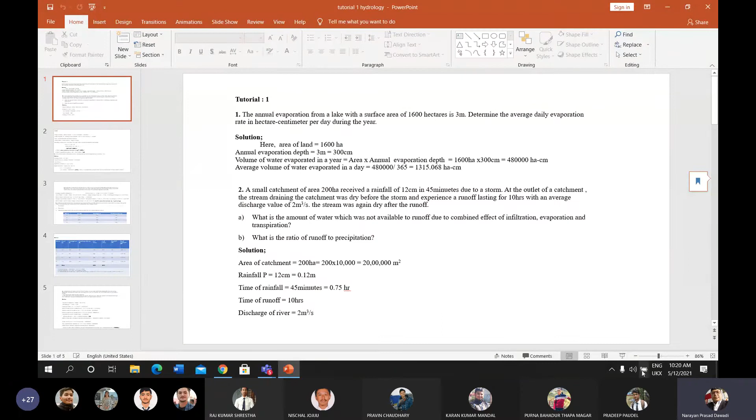Numerical problem related to the water budget equation, which we have studied in chapter first. This is the tutorial related to chapter 1, tutorial question number 1. The normal annual evaporation from a lake with a surface area of 1600 hectare is 3 meter.

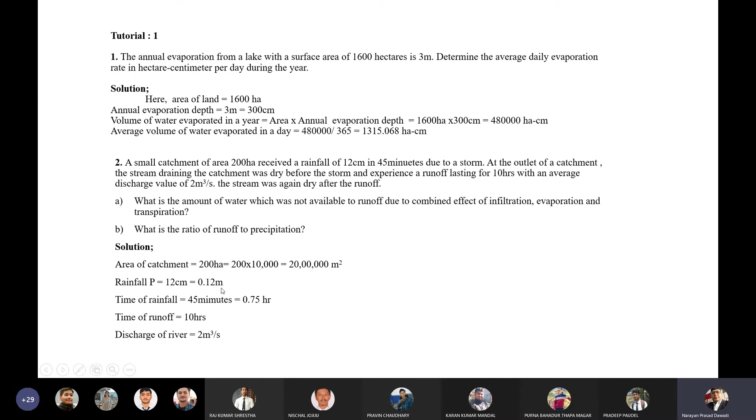Volume of runoff: we are given the discharge of the runoff and the time of runoff. Discharge is given in meter cube per second, time is given in hours, so the time should be converted into seconds to get the runoff volume R. The runoff volume will be discharge into time. The seconds cancel, and you will get the value in meter cube. This gives 72,000 meter cube.

Now, from the water balance equation, volume inflow minus volume outflow is equal to change in storage, denoted by delta S, as we discussed in the theoretical portion of chapter 1. The river was dry before the runoff entered, and it starts flowing with a discharge rate of 2 meter cube per second for 10 hours. After 10 hours the river again becomes dry. So the initial storage S1 is equal to 0, and the final storage S2 is also 0. The difference S2 minus S1 is 0. That's why the change in storage delta S is equal to 0.

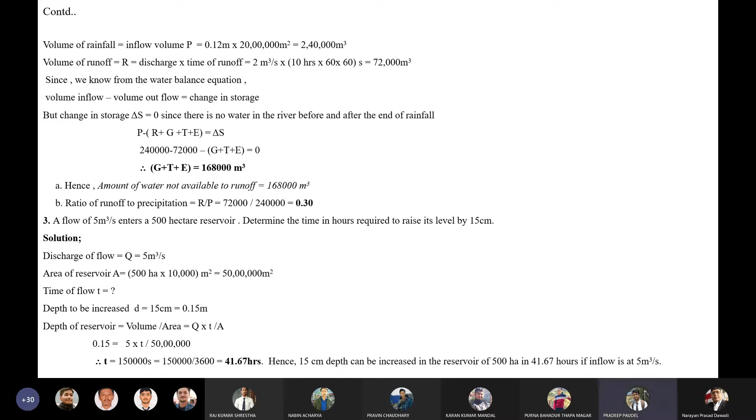Now, let us move to the question number. Estimate the constant rate of withdrawal. Constant rate of withdrawal, discharge. What will be the discharge withdrawal from the reservoir? Estimate the constant rate of withdrawal from a 1375 hectare reservoir in a month of 30 days. All this is estimated for the monthly basis.

The month contains 30 days during which the reservoir level dropped by 0.75 meter. The depth of reservoir was greater before 1 month. That depth of water is dropped by 0.75 meter. That is, change in storage is decreasing, not increasing, because the depth of water is being depressed or dropped. That's why the change in storage delta S value must be negative, because it is not increasing, it is decreasing. In spite of an average inflow into it was 0.5 million meter cube per day.

During this period, average seepage loss from the reservoir was 2.5 meter. The seepage loss was 2.5 meter. Total precipitation in the reservoir was 18.5 centimeters. The total amount of storm water that falls in the reservoir was 18.5 centimeter, and total evaporation was 9.5 centimeter. That is, total evaporation depth from the reservoir was 9.5 centimeter during 30 days. 18.5 centimeter entering water and 9.5 centimeter leaving the reservoir due to the evaporation.

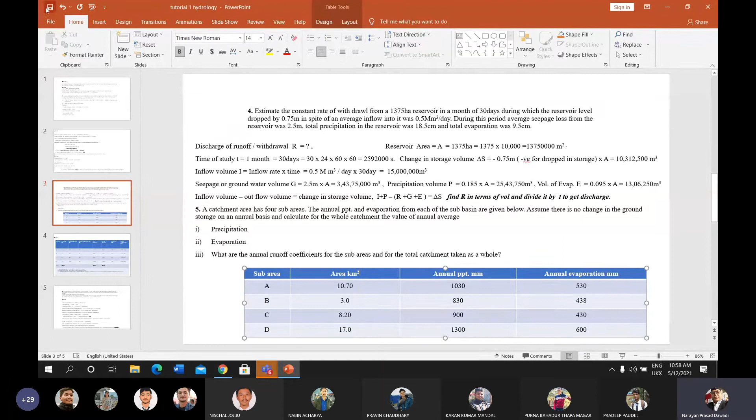Let's say now the annual precipitation and evaporation from each of the sub basins are given below for the year. Assume there is no change in the ground storage on the annual basis, meaning the groundwater level is not changed. Calculate for the whole catchment the annual average precipitation, annual average evaporation, and the annual runoff coefficient for sub areas and for the total catchment taken as a whole.

Four things are asked here. Find the average annual precipitation, find the average annual evaporation, find the annual runoff coefficient for each area, and with the help of each area's runoff coefficient, find the runoff coefficient for the total catchment area. This is question number 5.

I have already said that the annual runoff coefficient is the ratio of runoff to precipitation. You must know that. The question is given in tabular format: the area of each sub area, the annual precipitation, and the annual evaporation from that area are given. With these we can solve the problem.

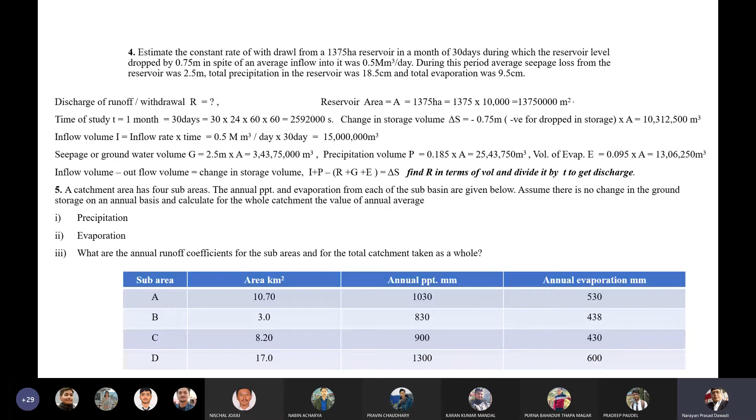Now I go forward to the next page. Solution. Sub areas A, B, C, D, area in kilometer square, annual precipitation in mm, annual evaporation in mm. Up to column 4, evaporation, this is given in the question. Now multiply the area by the annual precipitation.

10.7 into 1030, you will get the value of 11,021 kilometer square mm. The area is in kilometer square, precipitation is in mm, so multiplying them gives kilometer square mm as the unit.

Similarly, multiply the area with the annual evaporation. 10.7 into 530 gives 5671. 3 into 438 gives 1314. 8.2 into 430 gives 3526. And 17 into 600 gives 10200.

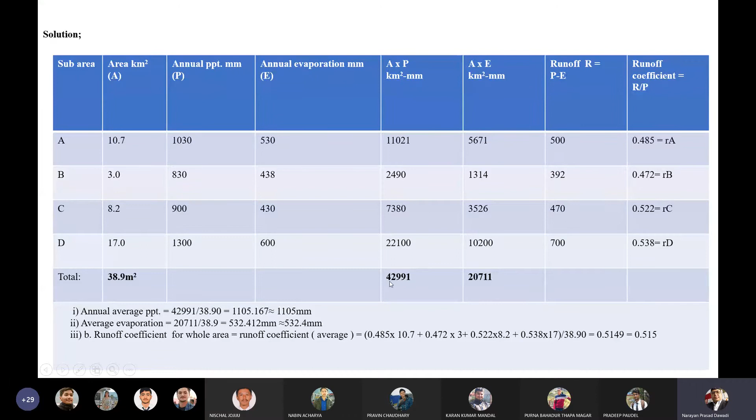Add all the values of A into P, you will get 42991. And add all the values of A into E, you will get 20711. This is the summation. If you sum all of these values, you will get this.

If you sum up the areas, you will get this. These are the summation of area, summation of A into P, and summation of A into E. You will get these values. After having these values, you can solve the problem in the tabular format or in the numerical pattern as in the written format. Now, runoff coefficient: runoff is given as P minus E.

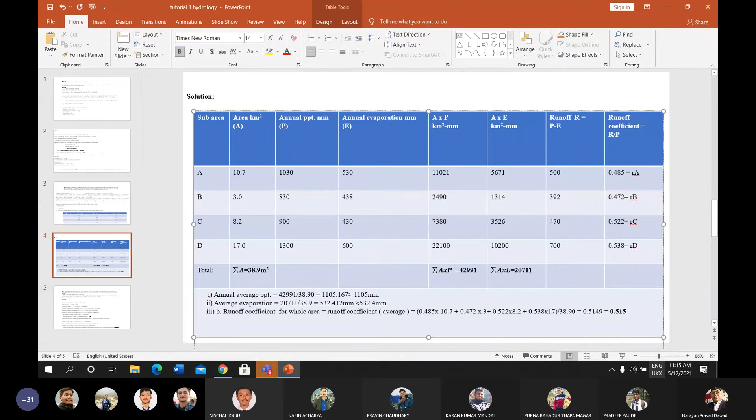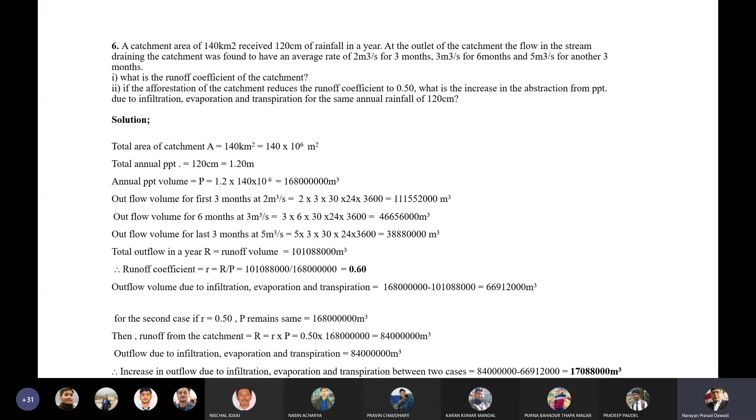This is the last question for tutorial number 1. This is the last question. A catchment area of 140 km square. The area of the catchment is 140 km square.

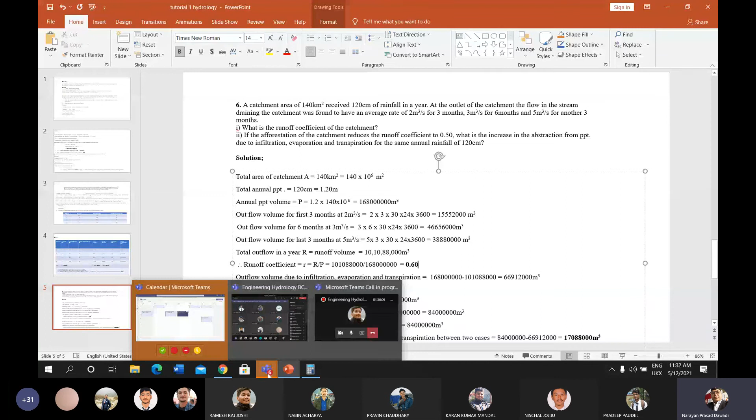Now let us discuss. What is the problem you are facing during this lecture class?